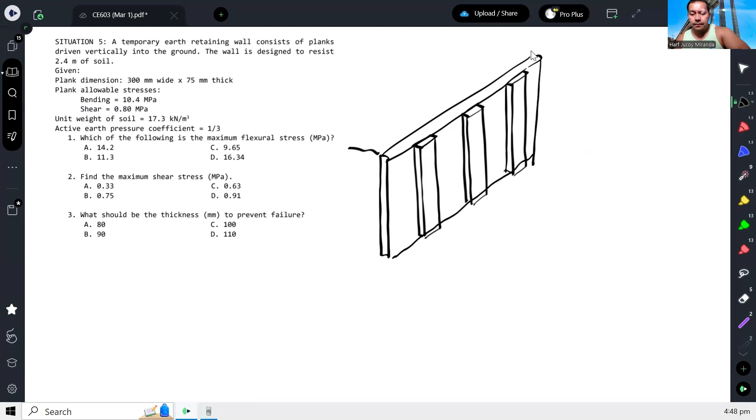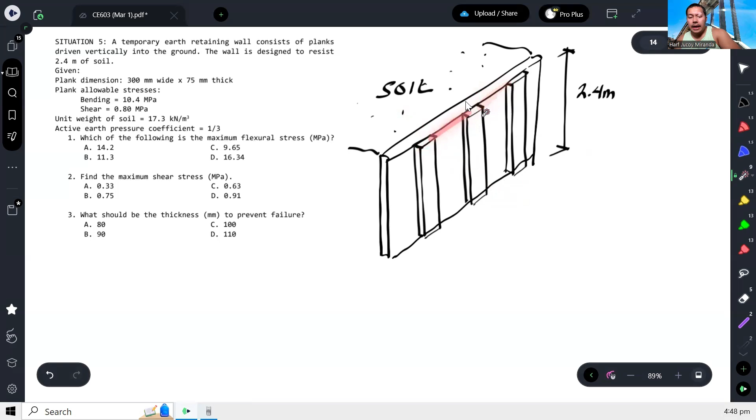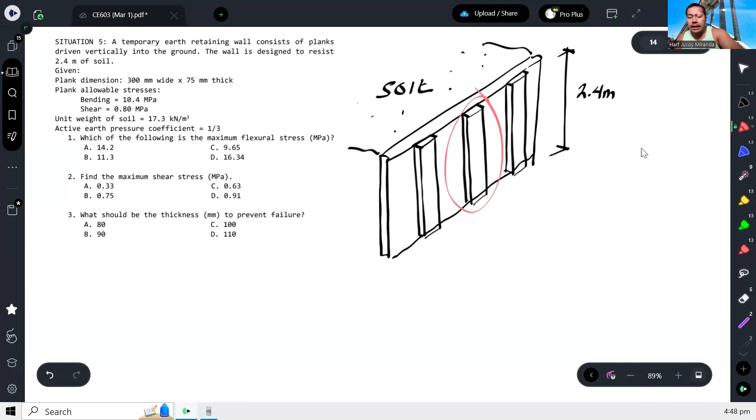So when it's like this, you are supposed to analyze per meter width. So it becomes per meter. Or if a spacing is given, that would be the tributary width carried by this plank. But since none is given, we can just use the width or dimension of the plank itself.

So let's assume it's like this, with soil behind it—that's what it carries, the soil behind. The width is 300, the thickness is 75, and the height is 2.4 meters. We will assume this is driven into the ground, meaning its body is submerged in the ground, so we will assume it as a fixed support.

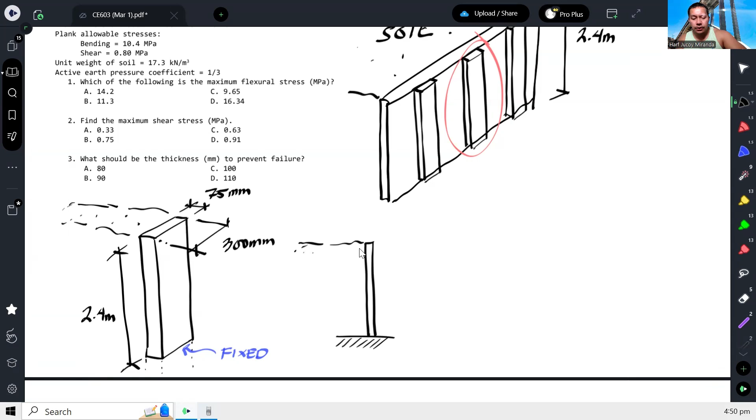The maximum intensity at the bottom would be KA—the active coefficient—times gamma, times H, the depth. When we compute this, that gives us 1/3 times 17.3 for gamma, times H of 2.4, giving us 13.84 kilonewton per meter squared.

Now we can compute the moment, since what we need is the maximum flexural stress, so we need the moment at the base—there's a reaction there, this is the moment reaction. So to calculate the moment, we take moment at the base.

The maximum moment equals the resultant, which is just the area, times the moment arm, which is 1/3 from the bottom. So that's 1/2 base—by the way guys, this is kilonewton per meter squared, since gamma is kilonewton per meter cube and H is in meters, so multiplying these two leaves meter squared, since KA has no units.

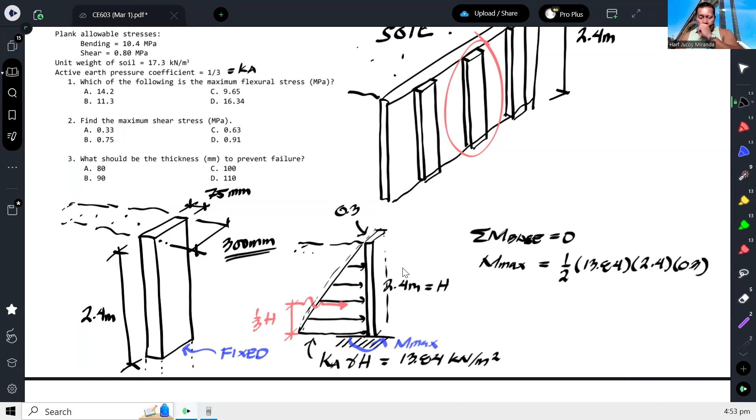And then don't forget, times the moment arm.

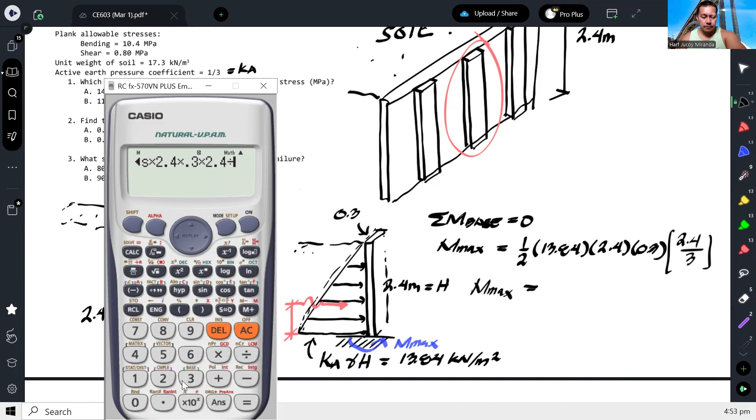Okay, so yung moment arm natin, as mentioned, 1/3 ng H, so 2.4/3. So our maximum moment at the base would be equal to 3.986 kilonewton meter.

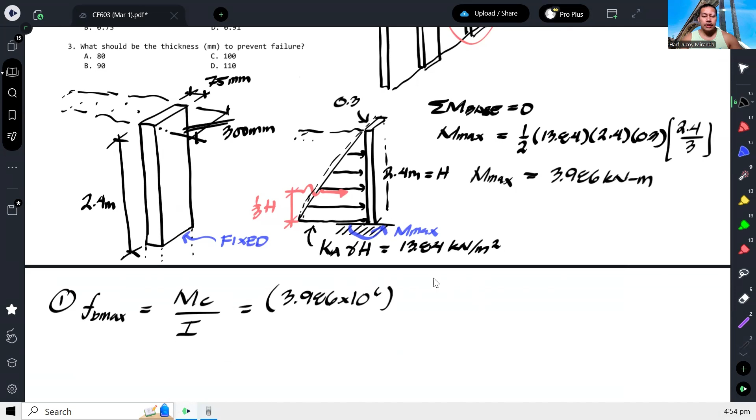And from here, we can now calculate the maximum bending stress, MC over I. So yung M natin, syempre, 3.986, gawin natin Newton millimeter. Ang tanong dito, ano yung C? Yun yung medyo tricky part dito. Okay, so take note na yung bending occurs in this axis.

Diyan yung bending. 'Di ba? Pag ganito, pag ganito yung bending, pag ganyan, okay, bending about this axis. So kung bending about that axis, kapag tinignan natin yung cross section, ganito itsura niya. Ito yung 75, ito yung 300.

Ito yung axis of bending. Okay, yan yung axis of bending. So ibig sabihin, yung C natin, ito, from here to here, and that is 75/2. So, this is 75/2. Tapos, yung I natin, di ba ang moment of inertia na gagamitin is yung moment of inertia about the same axis of bending.

Madaling sabihin na BH cube over 12. Tapos kadalasan ang ginagamit natin na is yung mas malaki. Pero hindi laging ganun, depende kasi kung ano yung axis of bending. Kung ang axis of bending mo ay ito, yung naka-cube sa moment of inertia is yung perpendicular na dimension. So in this case, yung 75. So it's going to be 300 times 75 cube over 12. And that is the calculation for the maximum bending stress.

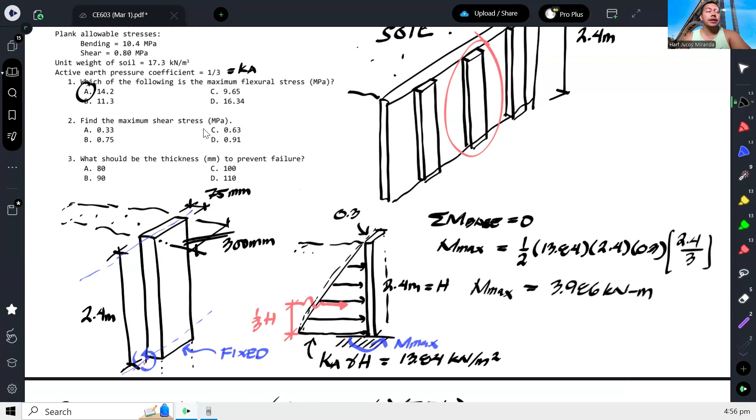Next, what is the maximum shear stress? VQ over IB. So bakit mo VQ over IB? Hindi ba pwedeng force over area? Total, may force dito, di ba may dito yung reaction, yan eh. Dito. Okay? Hindi ba pwedeng force over area?

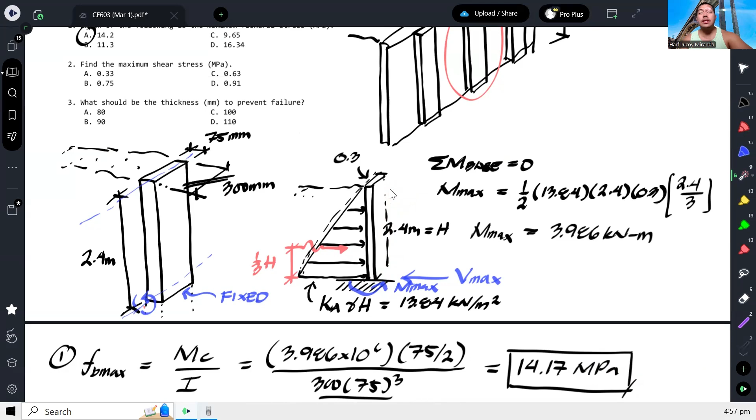So guys, applicable lang po yung force over area kung simple yung application ng stress, ibig sabihin direktang in-apply doon sa body. Dito kasi yung shear dyan ay merong combination ng bending. Magbe-bend kasi to, magbe-bend yan. So pag merong bending na involved, hindi na po pwede yung simple shear na force over area. Ang gagamitin mo na palagi is yung horizontal shear stress or flexural shear stress na tinatawag, na ang formula ay VQ over IB. So basta meron ng presence ng bending, lagi na yan, VQ over IB na kagad yung shear.

Okay, so our V, kumpitin lang pala natin, bali yung ano lang to, no? Summation of forces. So yung V natin, yung ano lang, yung ito lang, to. Okay, so that's 1/2 times 13.84 times 2.4 times 0.3.

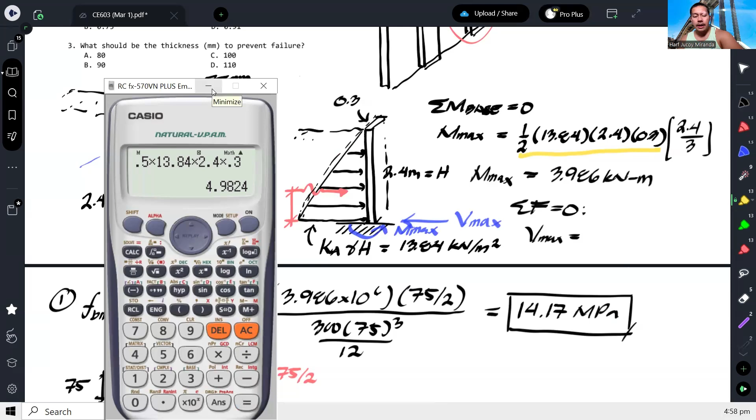So that's 4.9824 kilonewtons. Okay, so we have 4.9824, or times 1,000 para maging Newton. Tapos yung Q natin, again, pipiliin natin, ito yung magiging, dito kasi mangyayari yung maximum shear sa neutral axis kapag rectangle.

So yung area above, ito yun. Okay, ang thickness niyan, 75/2. Tapos yung width, 300. So yung Q natin, first moment of area, that is 300 yung base, yung height ay 75/2. Tapos yung moment arm nandito sa gitna ng 75/2, so 75/4. Ayan, VQ over I, again, 300 times 75 cube over 12.

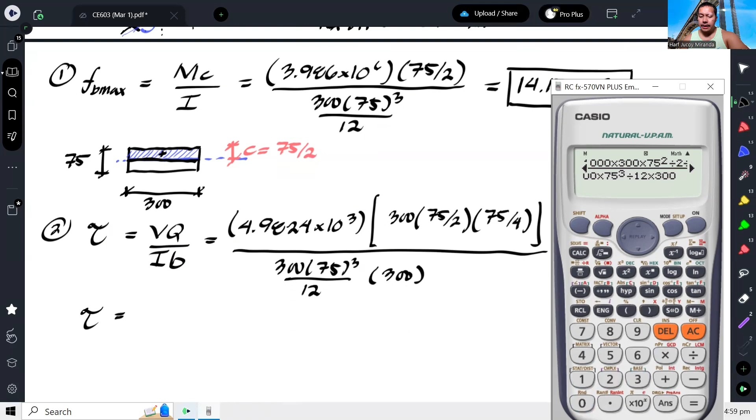Tapos yung B natin is yung kahabaan nitong fiber na to, which is 300. Okay, so our shear stress will be equal to times 300. Ayan, so our shear stress would be 0.332 megapascals.

Okay, that's letter A. Next, what should be the thickness to prevent failure? So siguro ang iniisip natin dito is ano daw yung hinahanap, ang hinahanap is itong thickness na to. So ano daw dapat yan para hindi mag-fail? Paano ba mag-fail? Di ba mayroong binigay na allowable stresses? Ito oh.

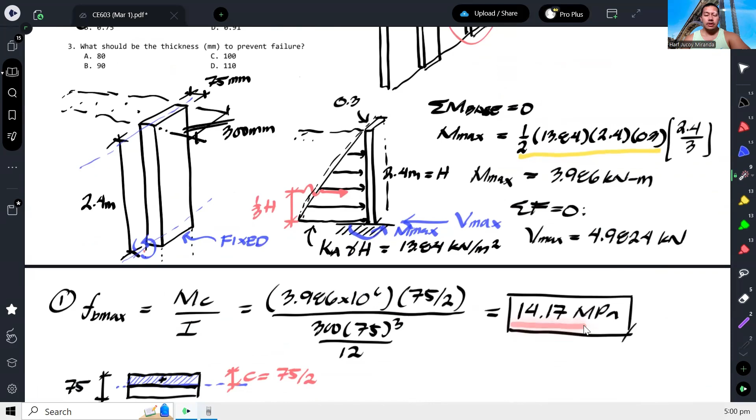So kailangan hindi lumagpas dyan. Pansinin nyo kasi sa bending, naging 14, so lagpas na siya dito sa allowable natin. Doon naman sa shear, actually, sa shear, okay lang siya, okay lang yung ano natin, yung thickness na 75. Ang nag-fail lang siya dun sa bending. Okay? So dahil doon, i-resolve natin siya or i-compute natin siya dun sa bending lang.

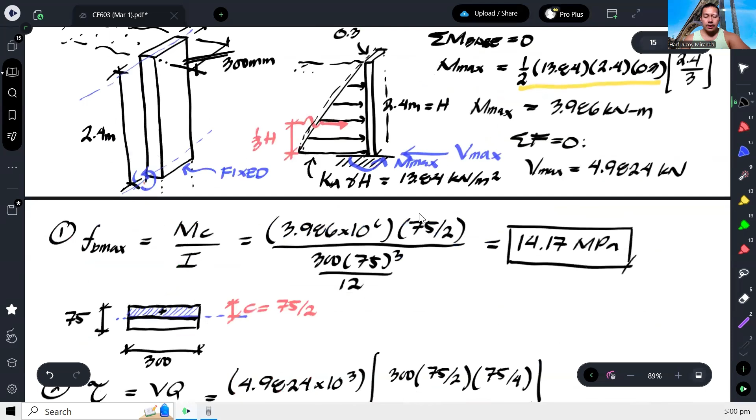No? Number 3. 10 point, ilan yun? 10.4. We will redesign yung thickness. So yung thickness na tinutukoy ko, ito. Ito, we will retain this to be 300. Okay, we will redesign T based on bending.

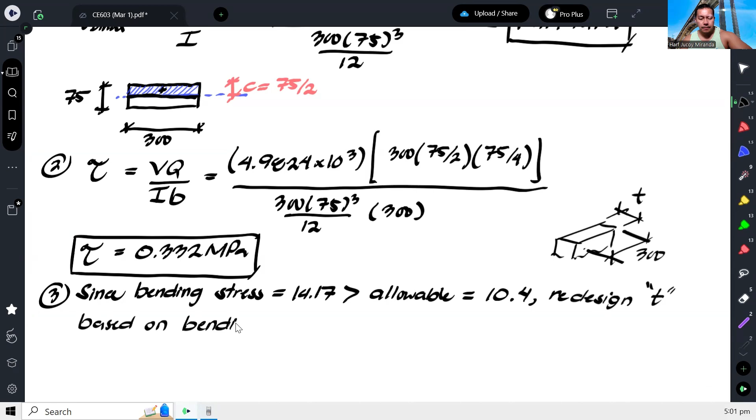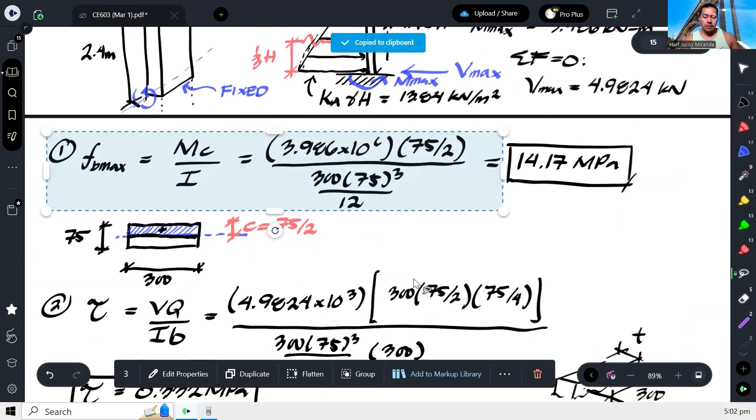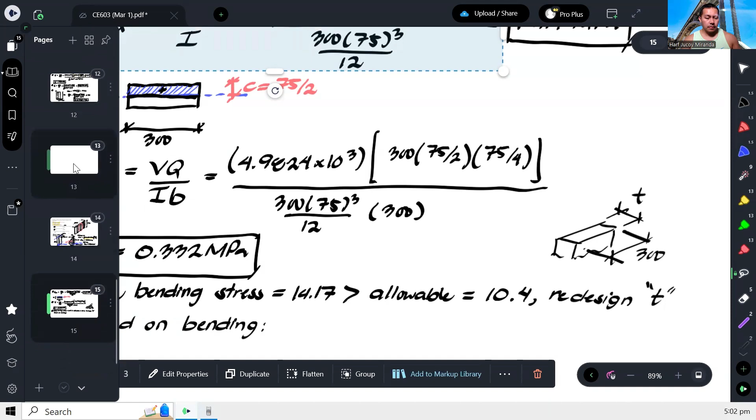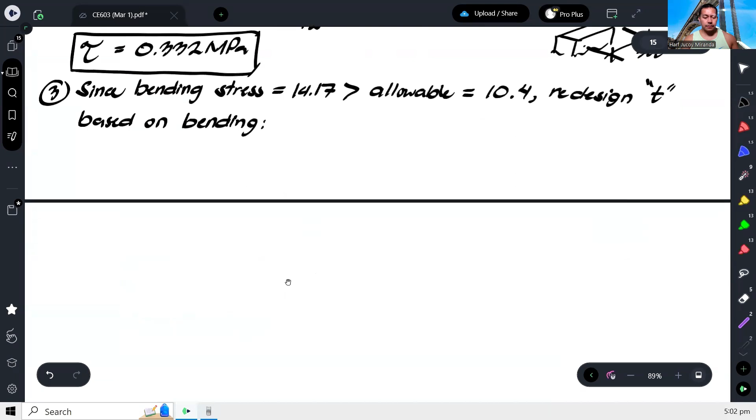Okay, so bali, ang gagawin natin, itong MC over I na to, papalitan natin to, gagawin lang nating T, pati ito. Okay, at dapat, yung magiging stress dito, hindi lalagpas ng 10.4.

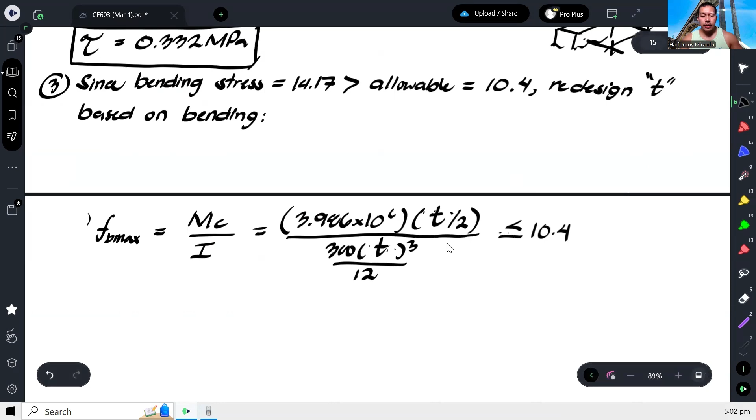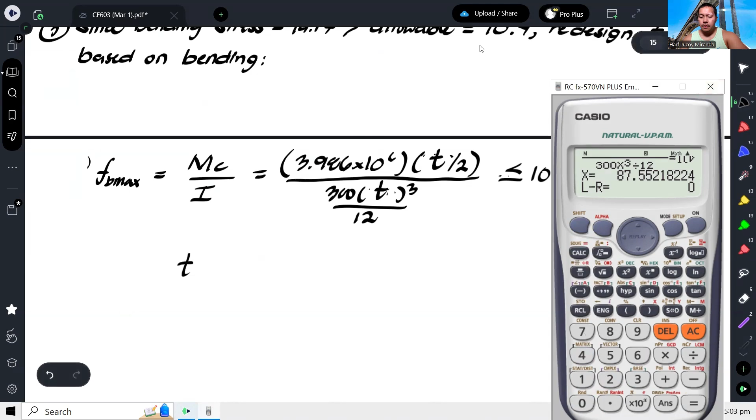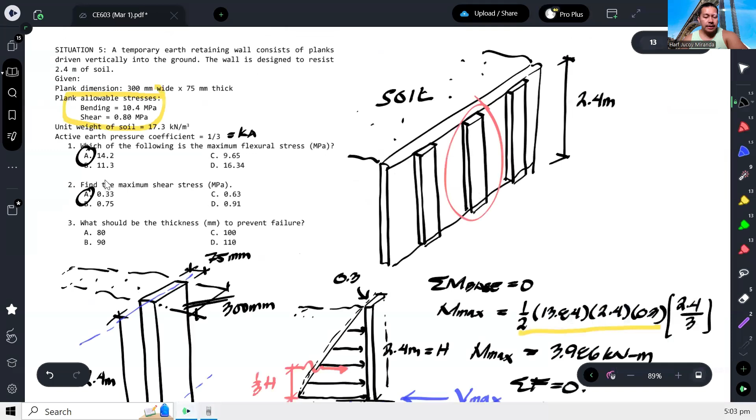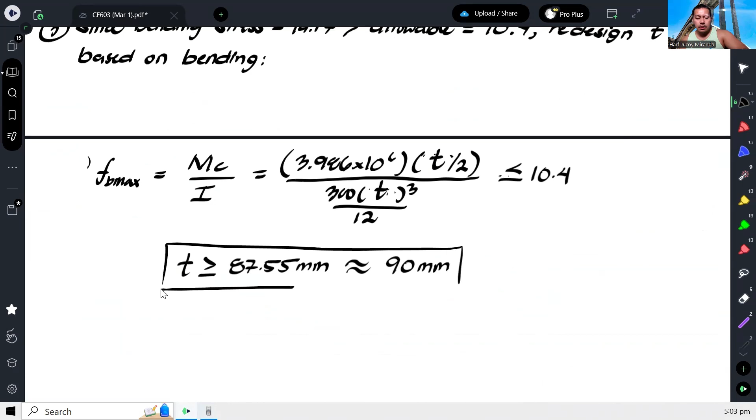Okay? And we will just resolve kung ano yung T na kailangan. So yung T na yon, solve natin. Ay dapat hindi lalagpas ng or hindi liliit sa 87.55. Okay, or approximately sa choices kasi naka by tens, o di approximately 90. No, approximately 90. So we will always round up kapag ka dimension. Okay? So that will be our answer for number 3.

Okay? And that's how we solve this problem.